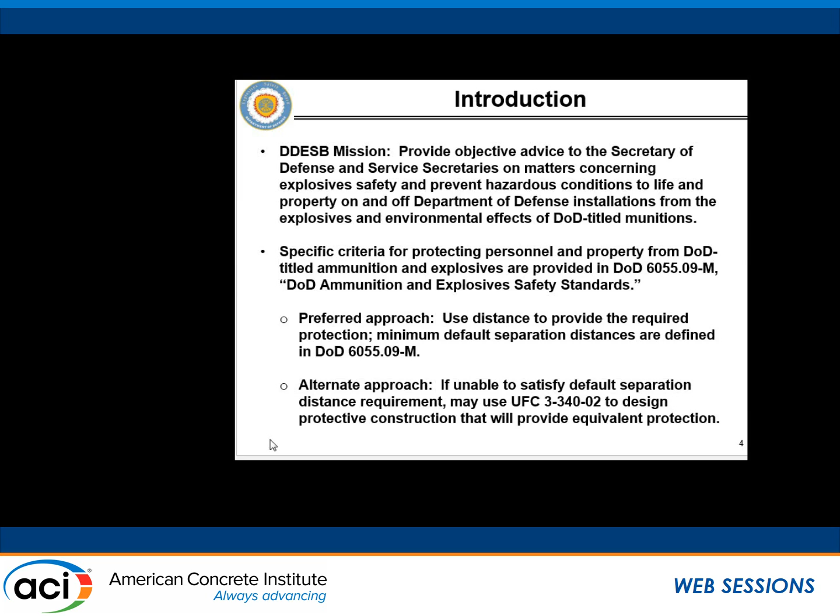That's what we do. So we're basically on DoD installations, providing the protection to the personnel, to the property, and then also, I'll get to this a little bit later, trying to manage the size of events if we have an accident so they don't get too large. Jumping a little ahead, but nowadays we do have a UFC that allows you to do protective construction design, so that'll be coming up in the next slides.

Okay, so the UFC, the purpose of the UFC, there's three things that it is geared towards. It's geared towards protecting personnel. So if you have an operation within a building, or even more so, if you have an operation in one building and another operation in another building, you're protecting the personnel to a certain level between the buildings. You're protecting property. So if you have a very high value missile, you don't want a blast in one bay to destroy the missile in the bay. You want to protect that property.

And then we're also trying to control the size of the events. This comes up, we have a lot of production facilities where you'll have maybe 10 bays in a row where you have ammunition and explosives. You hope that if you have a blast in one bay that it doesn't propagate, and you can design for that, so that the explosion in this bay doesn't cause an explosion in the next bay over.

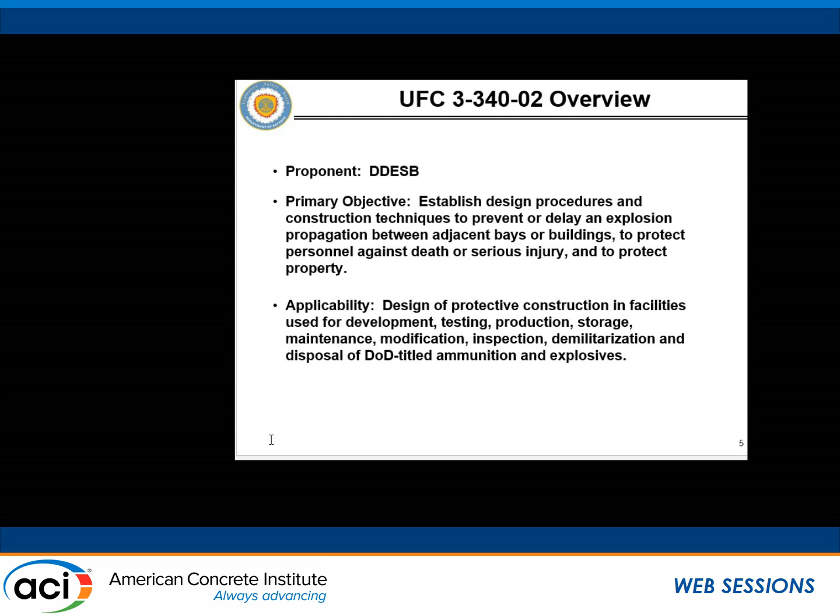What you even more don't want to happen is that those propagate so quickly that the blast waves coalesce, and instead of it being like a 500-pound explosion, it's like 1,000-pound because those two bays added together and made one big boom, or potentially all 10 bays added together and you have a 5,000-pound explosion, and you have the effects from that to the surrounding area. So that is the other area. And it applies, again, to our DoD-titled munitions throughout their life cycle.

Okay, the UFC, I'll give you a little bit of history. I talked earlier about using distance. When we had the run-up to World War II, and of course during World War II, there was an explosion of growth in the munitions area. There's a lot of facilities, a lot more need, and of course there was a realization in a war effort you can't always provide the distance, but they want to provide some level of protection, if they can. But they don't know what a wall is good for, what you should design for.

What happened, and I don't know the exact genesis of this, but it became very standard to use a 12-inch concrete wall to separate explosives between rooms for storage, what have you. It's just a 12-inch concrete wall with number 4 bars at 12 inches each way, each face, and stagger the bars on each face, so the grids are off by 6 inches. And this was used everywhere, basically. You'll find it in a large number of the plants.

You have some that use a little bit thicker walls or might have used different reinforcing, but the standard would be the 12-inch substantial dividing walls, which sounds great, except nobody really knew what protection you were getting. They knew they were providing some protection, or thought they were, but they weren't sure how much. During World War II, a lot of this was geared towards protection of assets and preventing one area from propagating to the next bay over, for the war effort. You didn't want to lose all your stuff.

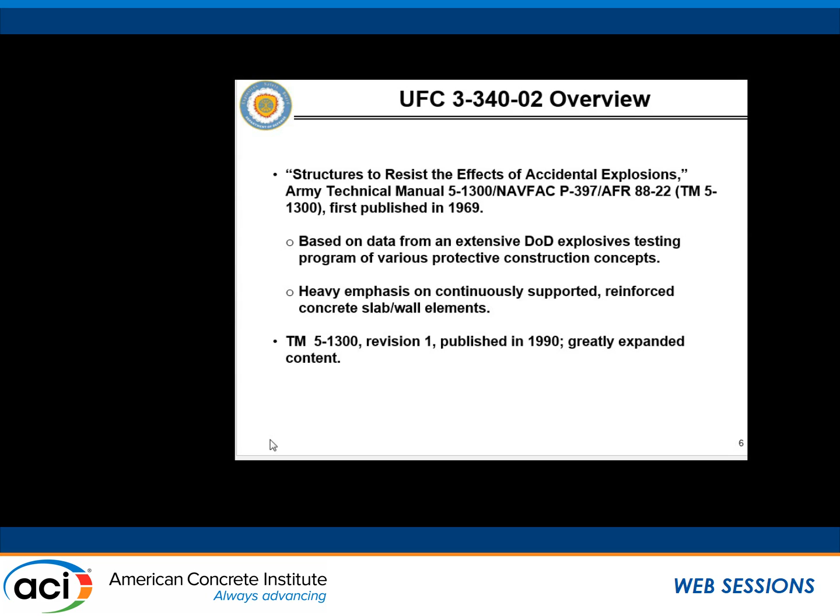Since it came from tests of these SDWs and concepts that followed, it's very heavily geared toward reinforced concrete, thicker walls than the 1 foot even. I mean, that's kind of the minimum in the UFC now, is a 1 foot thick wall. So that was the original 69 version. 1990, it was expanded. It expanded the concrete guidance, but also added guidance for other materials, and I'll get into that in just a moment.

Work has continued. We've converted the manual over to a UFC in 2008. Again, there was research testing done that we wanted to implement in the manual from the 1990 publication date. The big thing for us, to be honest, was we had very rigorous diagonal tension requirements, lacing of the rebars. For those of you who are familiar with it, it's a very difficult construction technique. And we had lots of defaults of contractors that weren't able to build the things that were designed. And we had research that showed you could use a much more easily constructed system to have that protection. So that was one thing that went into the 2008 version, then other changes as well.

More recently, and this is the focus of today, we issued Change 1 in 2014. We have some presentations on that to follow that'll get into the nice, juicy technical details of the changes. And then we unfortunately have Change 2, there was data put in that the equations were wrong, and so Chuck alerted us to that, so we changed it back to what it had been before.

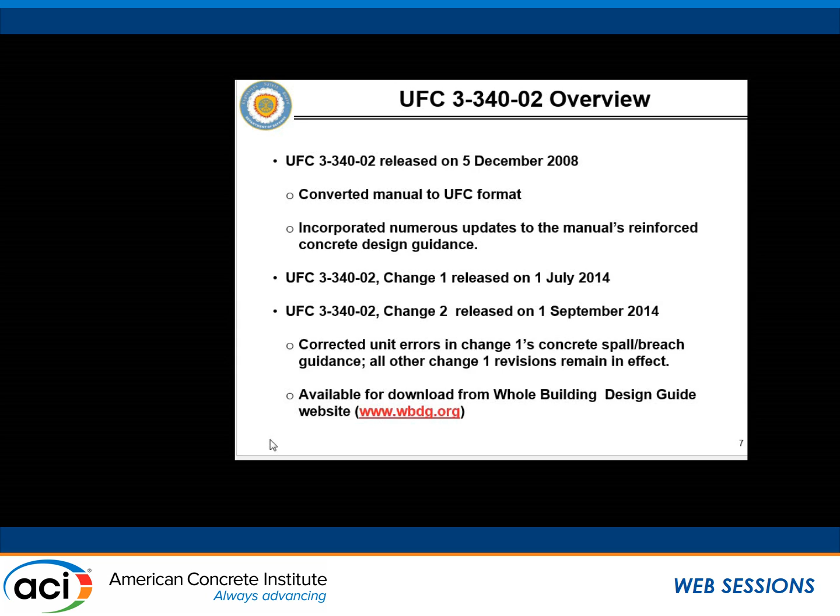What makes our manual unique? Within DoD, a lot of our guidance is limited distribution. And what typically makes it limited is there's munition effects data. If you have munition effects where people can predict injuries and what have you from different rounds, that has to be limited. And we don't have that data, so it has always been an open distribution document. And as a result of that, it's widely used. It's been used for years. It was out since 1969. The procedures are straightforward, so it's accessible to engineers.

One of the other big things is, as I've discussed with the SDW test program, we have a heavy focus on internal blast, which makes us unique. Most other user communities are looking at an external blast event, be it anti-terrorism or protective construction design for someone bombing your building or what have you.

You're trying to protect the people inside, where ours often are internal blasts. So we have many special requirements related to the internal blast environment. This has been something we've talked about. Back in '69, things had to be relatively simplistic. There are much more advanced modeling techniques available now, so there's a push in some parts of DoD to go towards that.

The problem that we have is we have no control over who designs our facilities. The services let the contracts. They could get somebody that's great, that really knows their stuff, or they could get somebody that just says, hey, I can do blast design, and they've never done it before.

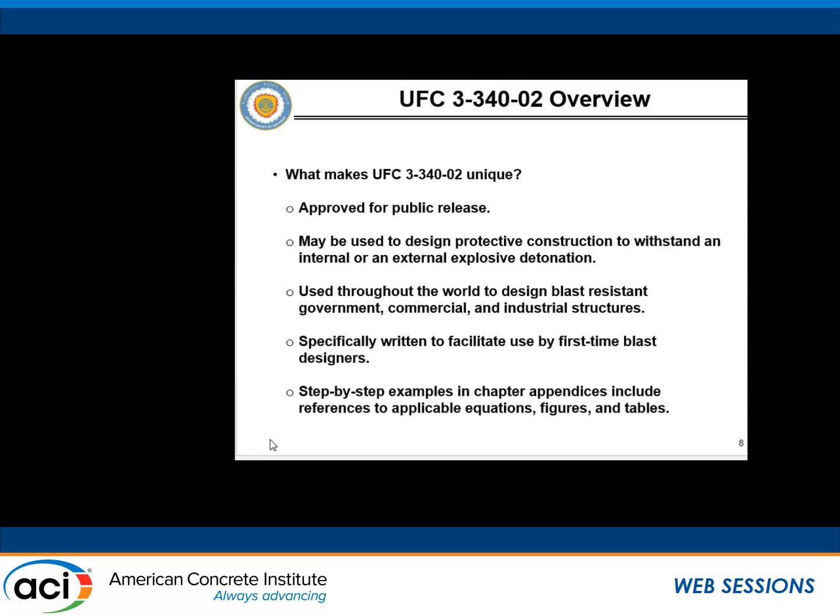And so we have made a decision to try to keep our methods as easy as they can, where there's step-by-step examples you can go through, with the goal of having a safe design at the end of the day. The thing none of us wants is to get a design in and then have to say, you just completely screwed up, you need to start over. So the manual, for our applications, again, it's a reasonable approach.

So what's in the UFC? We have our criteria. There's 6 chapters. It's 1,800 pages. It's a big manual because it has lots of load tables, pressure tables, lots of information in there, so you can do things by hand if you need to. Chapter 1's introduction, and I put this part up because it goes through what we do for personnel protection. We have very specific criteria for what you have to protect personnel to.

So incident overpressure can be no more than 2.3 psi. They can't be impacted by a hazardous fragment, which is one with a 58 foot-pound energy. That's based on testing back in the 60s of what would take someone out of combat. Not necessarily kill them, but make them where they would no longer be able to fight. And then a thermal flux criteria as well, to prevent burns. So that's what our criteria largely is.

Protection category 2 isn't used that often, but we do have that to protect equipment, supplies, explosives. And then our last 2, at least from a designer standpoint, are the same. They're the prevention of a propagation. We are not that refined where we can say that, yeah, it'll propagate, but there'll be enough of a time delay that the events won't coalesce. So when we design for 3 or 4, we use the same criteria. Basically, we try to prevent a propagation, not just delay.

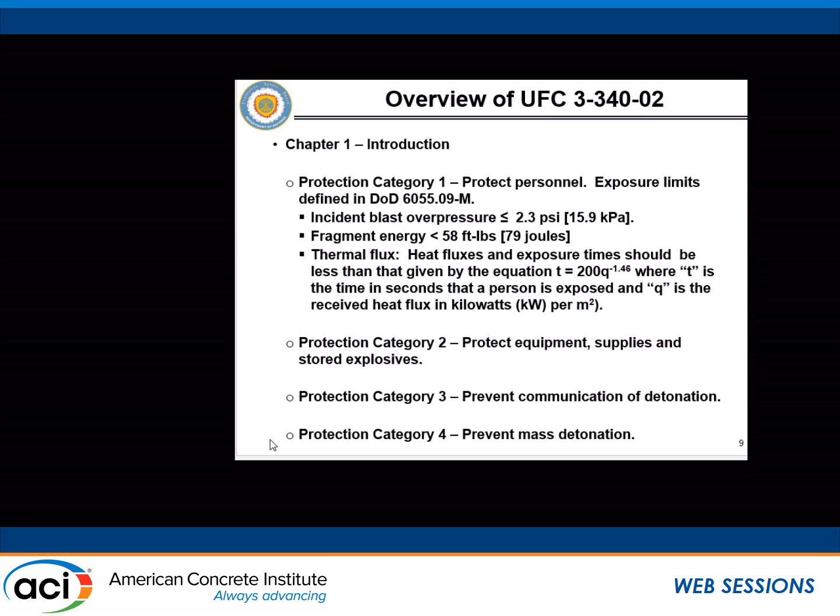The rest of the chapters: Chapter 2 gives you the criteria to calculate your blast loads. Thankfully, that's automated. In the old days, you had to do it by hand, and that was not fun. But there's SHOCK and FRANG codes that we have available, and we'll be talking later about a Comblast code that updates SHOCK and FRANG, where you can calculate that easily. And those are open distribution codes as well.

Chapter 3 goes through single degree of freedom systems primarily and how you would use them. Then we got 4 for concrete, 5 for structural steel, which is not as detailed. We don't use structural steel a lot, main reason being that we usually have a fragmentation hazard, and the steel can't defeat that hazard. And then 6 is the catch-all for other materials like reinforced masonry, precast, prestressed, glass, pre-engineered metal buildings, doors. It's just a catch-all for whatever other areas we had data.

Okay, our working group. We were founded in 2003. As I mentioned, one of the key motivators was the lacing issue with concrete and the difficulties we were facing with construction. But there are also other areas that needed update. So we have representatives from all the services, and we meet annually to go through what is the service need. That's our key driver, and we develop updates and review them, try to keep things moving along.

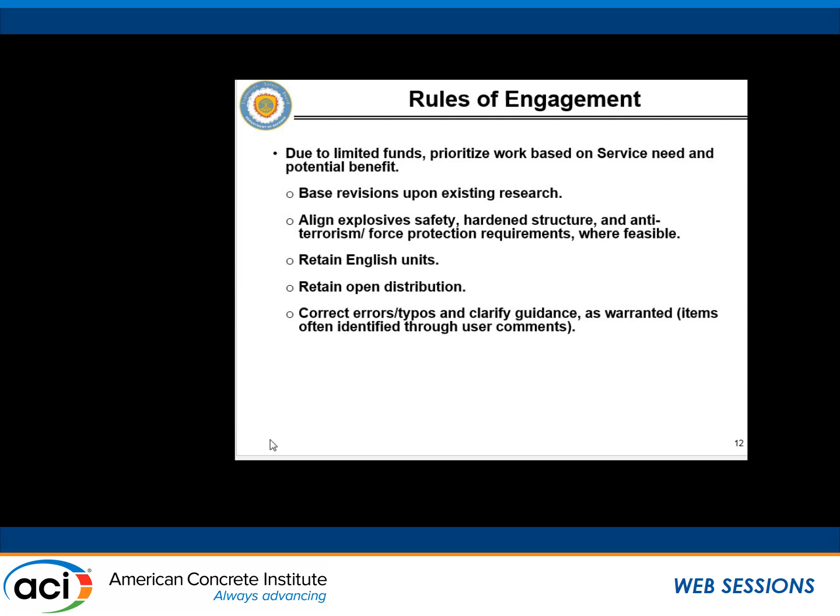We want to keep it as an open distribution document. And then correct errors. We have a system through the whole building design guide where if you see a problem with an equation or you don't understand criteria, you can send in a comment. And so we try to correct those. Hopefully that background will let you understand where we are and why we do what we do.

This is just a quick summary of the big changes that were done with change 1 in 2014. Major revision to the masonry guidance. For the first time, we allow mechanical couplers, which was a big advance for us. We had it in our manual for many, many years, but you couldn't meet the criteria because you had to have the mechanical coupler take the load without reducing ductility. And the coupler systems usually have some reduction in ductility over the rebar by itself. And so, practically speaking, you couldn't use them. Well, now we have a testing protocol and a way you could allow couplers in some construction.

We made some more modest changes, better guidance on what the manual covered and what it did not, expanding the gas pressure curve downward, because we have cases where the weight to volume in a room was lower than the curve covered, giving a little more guidance on lap splice requirements and non-contact laps. And then we did lower our support rotation limit for equipment protection to try to minimize scabbing of the concrete.

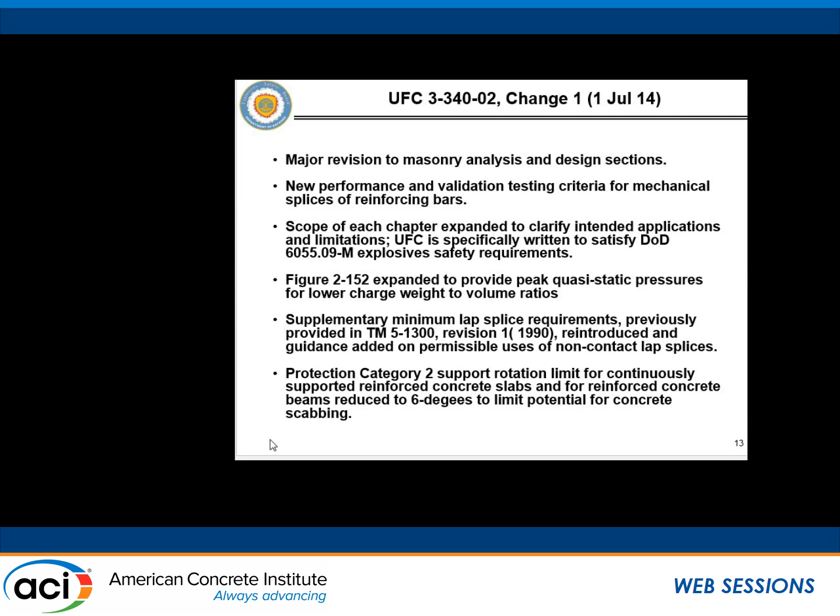Future work, we met just this last week. We are in the process of updating the glass guidance. That usually isn't a big priority for us because we can control what people do on the base. But we do have cases where you'll have an operation that's, say, a dock, and they're going to bring in more weight than they had. So previously they were outside the distance arc. They were far enough away that it was okay. They make a larger weight, then now they're inside the arc. So we're going to try to give people guidance on where to go for glass breakage criteria. And that'll basically go to the ATFP criteria so they can do their analyses.

We'd like to update our steel guidance. It's based on the 1977 and 1983 AISC codes. So that would be nice to update that. We would like to, this could be a topic in and of itself, but our procedures for calculating gas pressure in a bay are conservative. We'd like to reduce that conservatism, but we don't have test data yet to do it. So we would love to get money to do some testing.

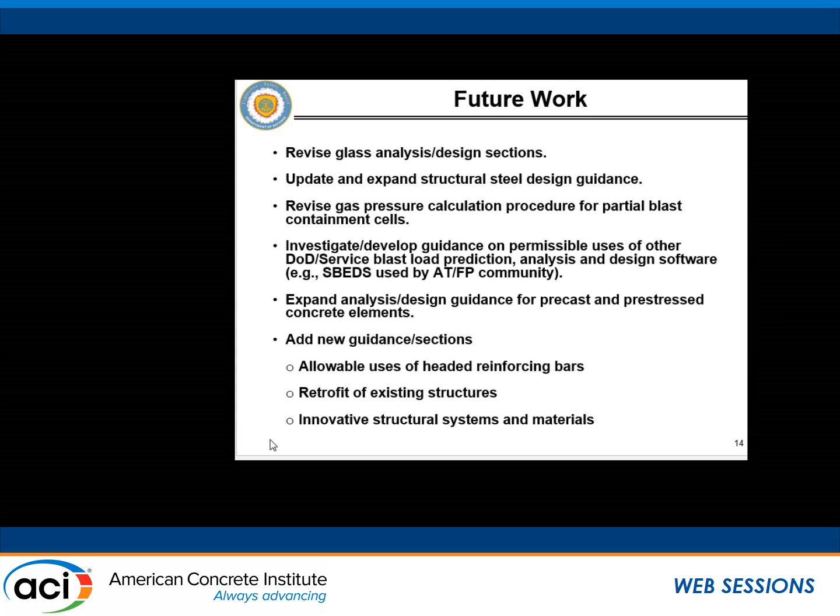Look at codes that we might be able to use to automate the design process. We had a code called CBARCS we used for years for concrete, but it is so old that it no longer runs on the Windows operating system, so we need to do something about that. And then we're talking about precast, pre-stress, maybe expand our guidance there, and add new guidance in various areas. I think I'm just about out of time, so let me make conclusions.

Okay, our manual is great, but it's for explosive safety. It's written for explosive safety, so you'll have other user communities that are like, why don't you have this? Why don't you have multi-story buildings? Why don't you have seismic stuff where we can do seismic interaction with blast? It's not our purpose. We don't have funds for that.

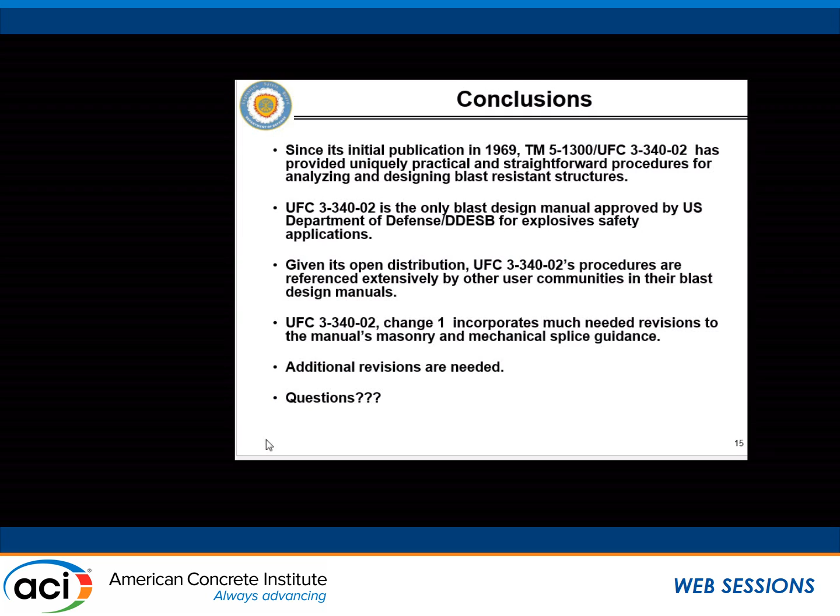It's open distribution, so it's used a lot, and we get referenced a lot in other guides. The ASCE Blast Standard references us a lot. So that's a concern for us, that it's referenced correctly, but otherwise it's fine. Change 1 has very good changes, the masonry and the couplers in particular, and we need to do more.